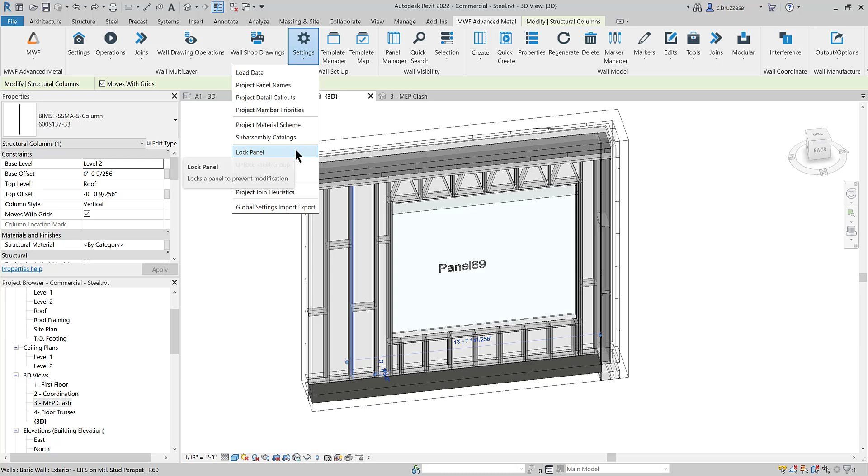Today we'll do a refresher on a tech tip from the past, but we've since updated the tool a little bit. For anyone familiar with the lock panel, this was a command we basically use for Onyx, but it can also be used individually. It basically places a full framing lock on the panel, preventing any regenerating, so you can't make any changes whatsoever to that panel.

What we've since added is this secondary option called a framing lock. This one was created to let you use post-processing tools on your panel. So if you want to use MEP Clash, or add hole series after the fact, you can still do that with a framing lock. It prevents other modifications, but at the very least lets you run those post-processing tools.

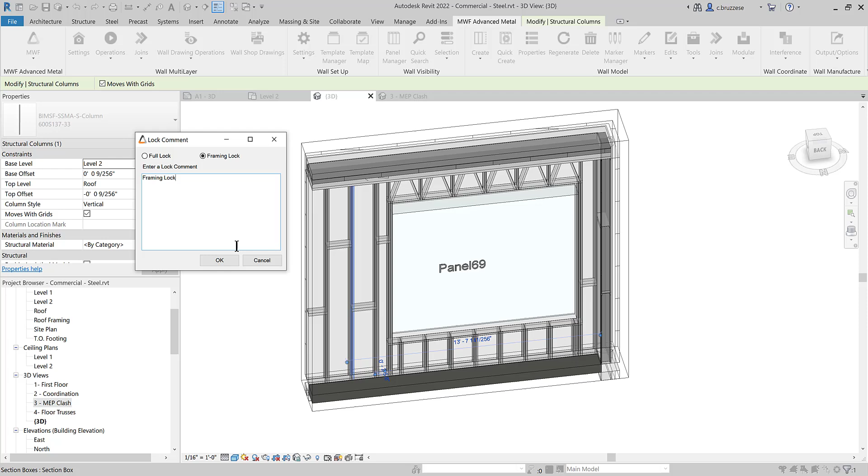So I'll put a framing lock on this, and you can also add a comment to it, just like we could before. With any of the locks, once you run the locking command, you'll get an overlay, and if you click on it, it'll show that your panel's been locked. But with the framing lock in particular, you can still run some hole series tools, and it can still be used with MEP Clash.

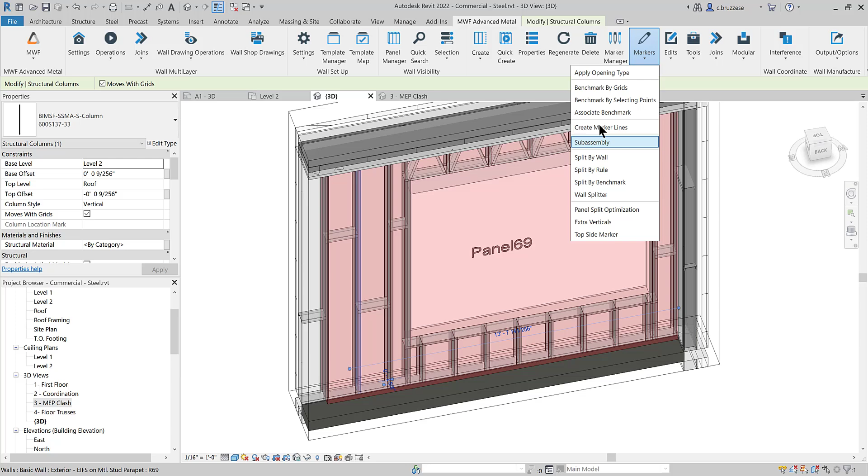So if I wanted to run a quick marker line so I can punch out my studs, I'll use the marker line option. And let's actually punch it out vertically, so we'll get a hole on our nogging and on our tracks as well.

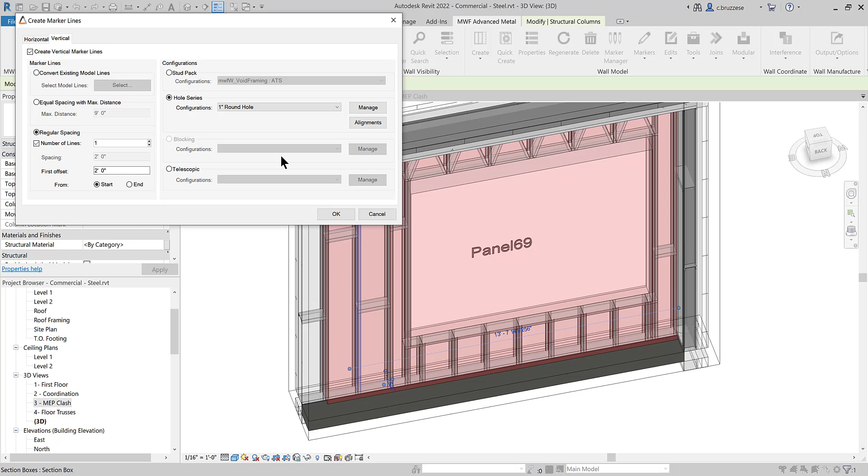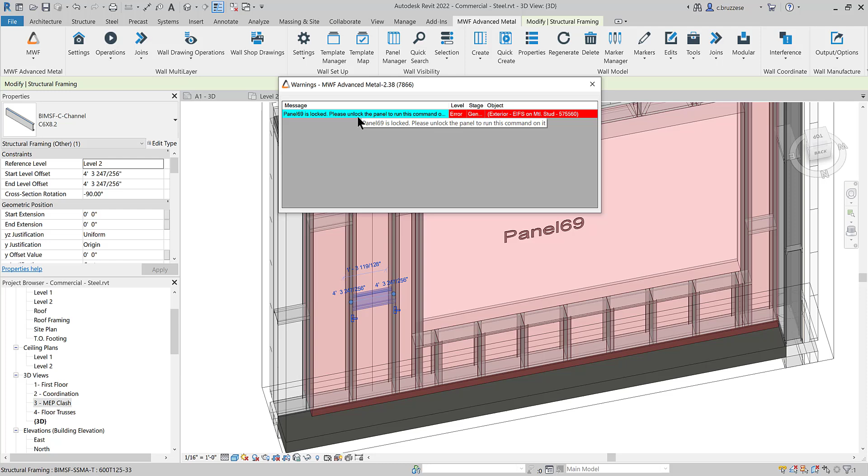I'll just add a marker line, simple enough, at 2 feet from the start of my panel. If I try to do a global regenerate, a basic regen with the tool, you'll get this pop-up telling you that it's locked. If you want to run this type of regen, you just have to unlock it.

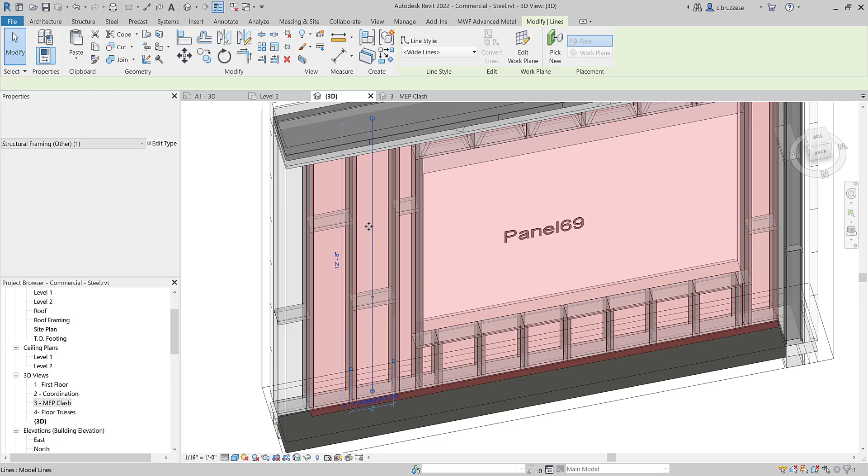With the hole series though, there's a separate regen in the tools, and this works with the framing lock. So you can put in your markers, and then just tell it to regenerate the hole series. Once that regen is done, I'll actually see my studs, or in this case my noggings and tracks, punched out.

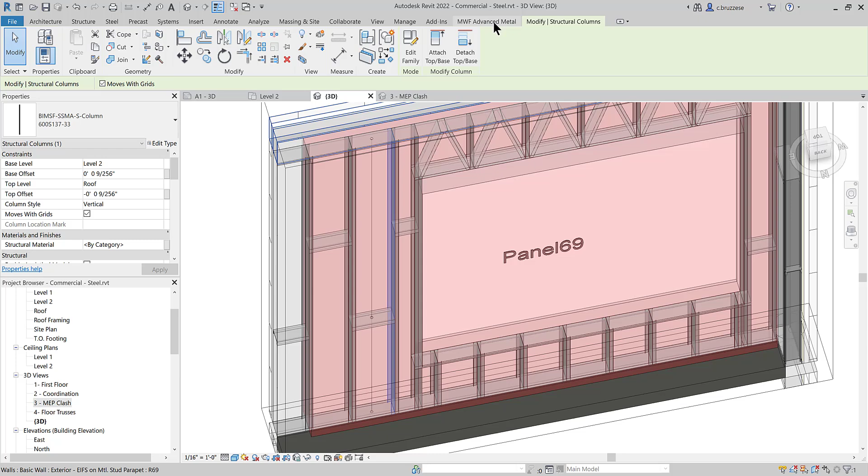And there you go, it's still locked, so I can't go ahead and regenerate it with any other tool, but it does let you add in your hole series. All of these other deleting and editing hole series options will still work on a locked panel. So the idea with the framing lock is to let you use post-processing tools on a panel that's locked.

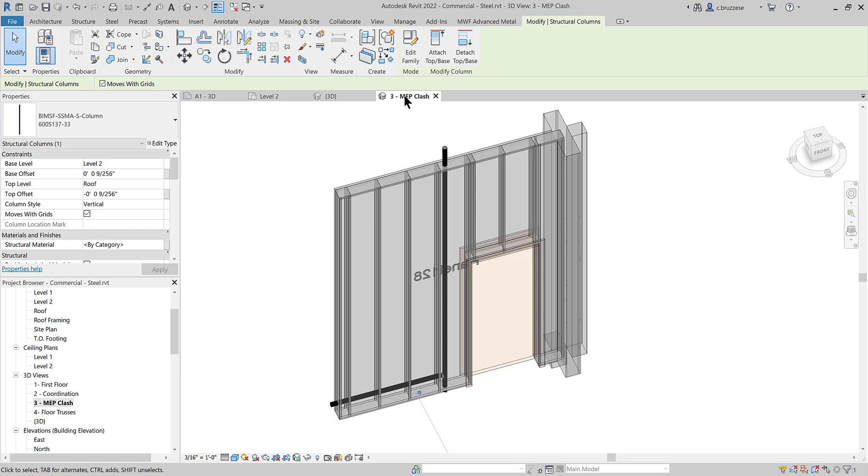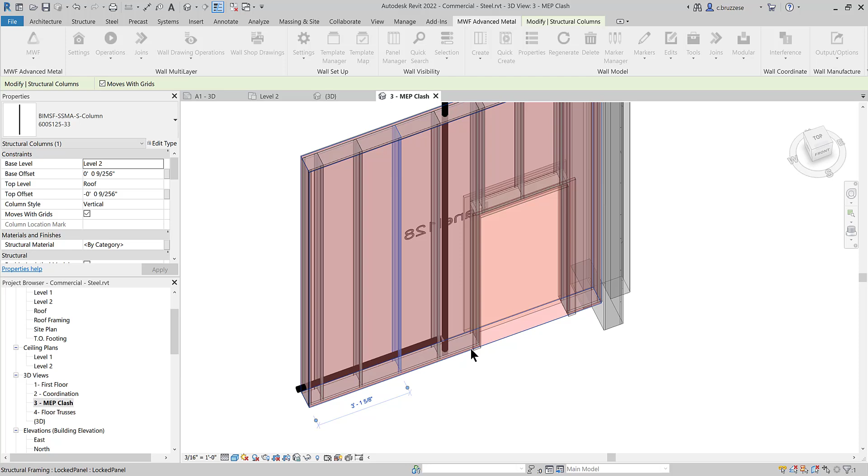Another good example of this is for your MEP Clash. Again, I'm going to go ahead and just do the framing lock. And when I run MEP Clash on this, again, it's a post-processing tool separate from a panel regen, so it's able to run these types of hole series.

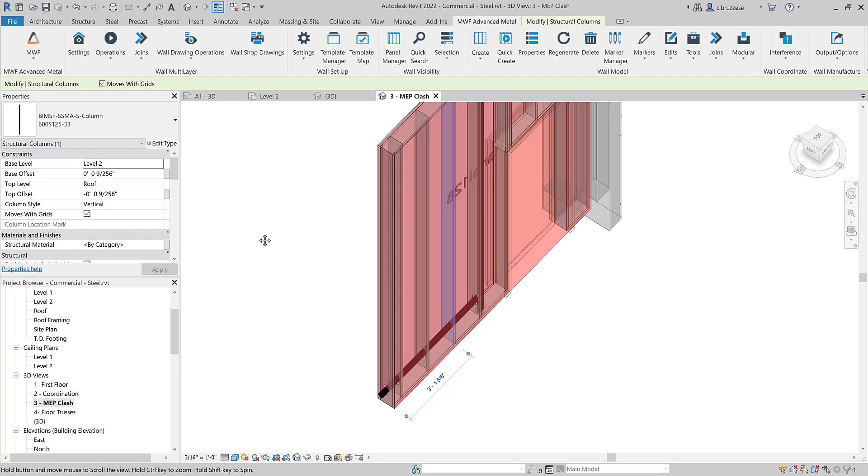Once you have a framing lock on there and you've run your MEP Clash or hole series, you could always go back and put a full lock on the panel. That changes the overlay a bit, to a darker red. But now if I tried to run a processing tool like MEP Clash or add hole series, I'd get that same error message saying the panel is locked, and I would need to unlock it to run the MEP Clash.

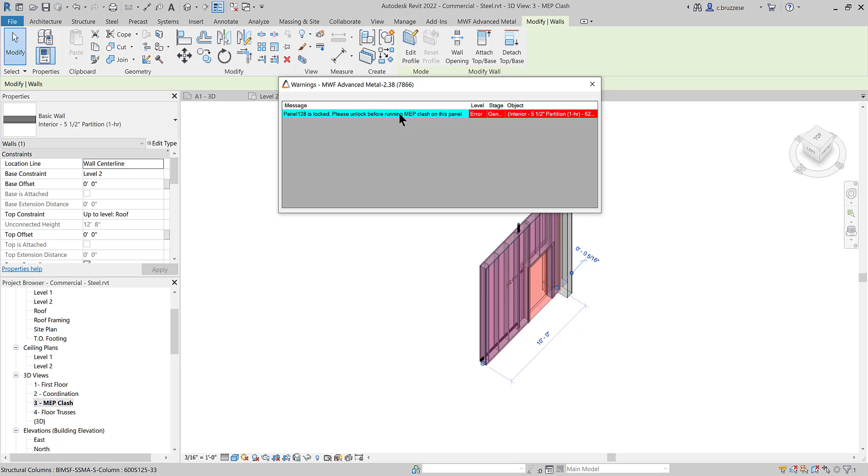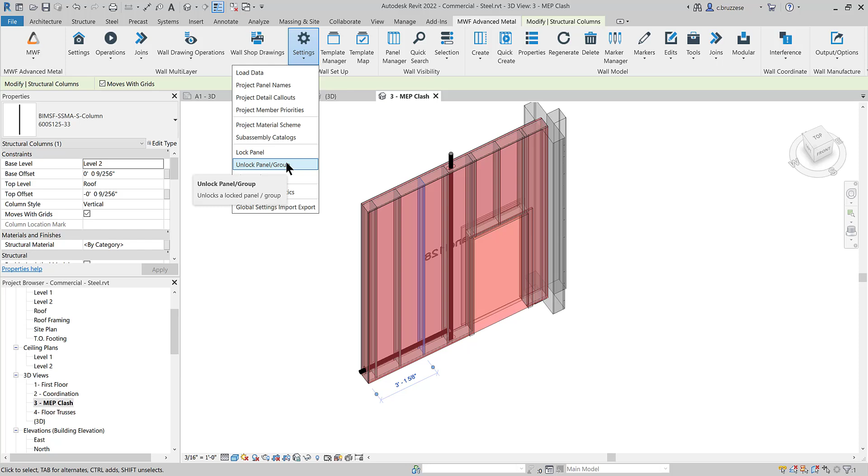So again, 2 different stages of locking. The framing lock is meant to let you work with the post-processing tools a little bit more. And as per usual with any of the locks, you could always unlock it to get back into your panel.